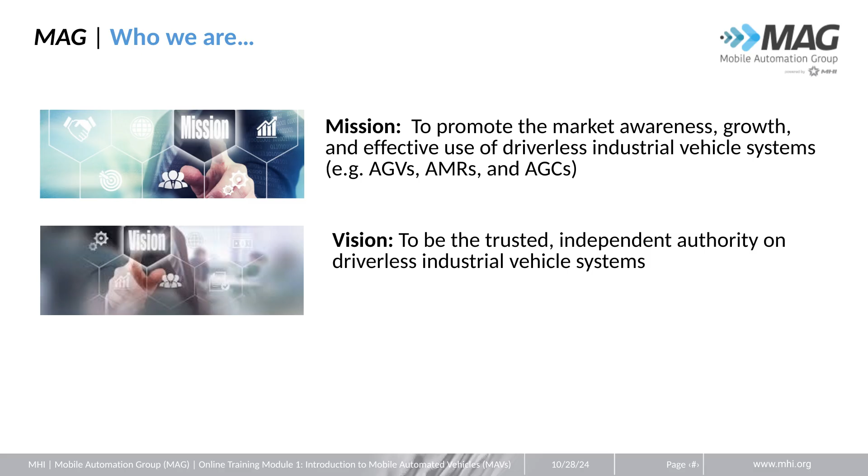What are mobile automated vehicles? Mobile automated vehicles, MAVs, are computer-controlled wheel-based load carriers, usually battery-powered, that run on a plant or warehouse floor or, if outdoors, on a paved surface. Although some applications call for just one MAV, most installations utilize a fleet of vehicles.

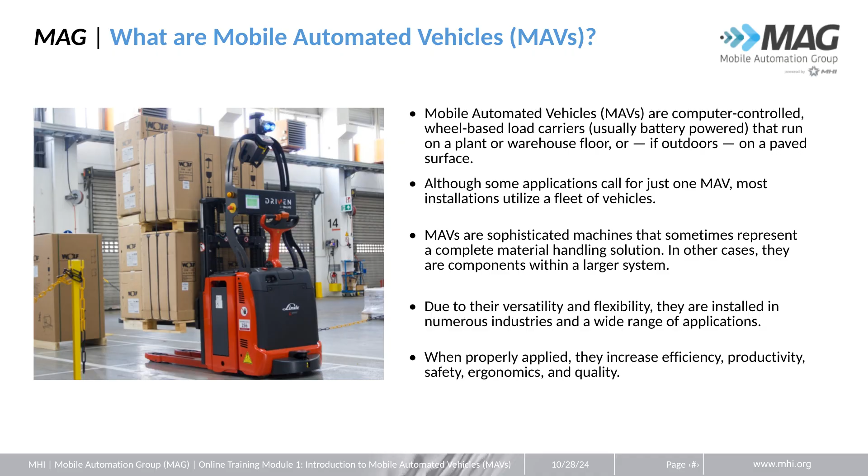MAVs are sophisticated machines that sometimes represent a complete material handling solution. In other cases, they are components within a larger system. Due to their versatility and flexibility, they are installed in numerous industries and a wide range of applications. When properly applied, they increase efficiency, productivity, safety, ergonomics, and quality.

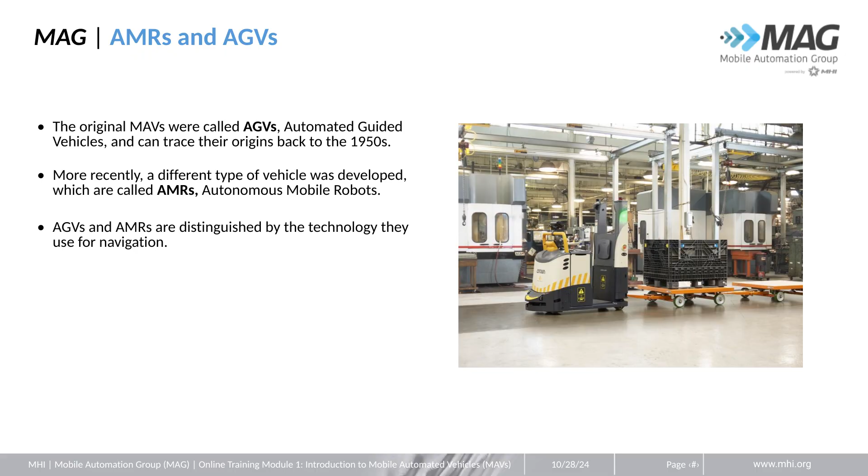AMRs and AGVs. The original MAVs were called AGVs, Automated Guided Vehicles, and can trace their origins back to the 1950s. More recently, a different type of vehicle was developed, which are called AMRs, Autonomous Mobile Robots. AGVs and AMRs are distinguished by the technology they use for navigation.

AGVs follow a predefined path and do not deviate from that path. They typically have collision prevention in case an object is in their path. AMRs sense their surroundings and make decisions autonomously on what path they take. They typically have obstacle detection to enable this decision-making.

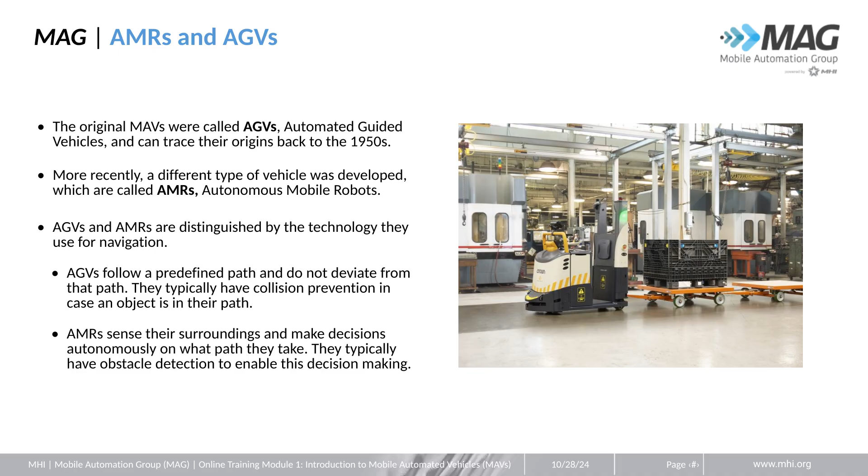Mobile Automated Vehicles Evolutions. MAV is a universal term for mobile automation technologies. As companies develop new products and standards evolve, new names continue to be introduced to describe their MAVs, such as LGVs, laser-guided vehicles, SGVs, self-guided vehicles, IMRs, industrial mobile robots, UGVs, unmanned guided vehicles, and MMRs, mobile manipulation robots.

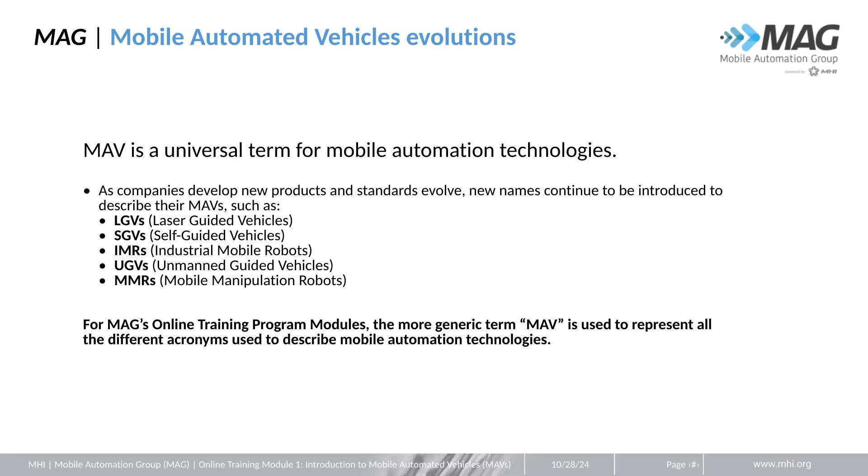For MAG's online training program modules, the more generic term MAV is used to represent all the different acronyms used to describe mobile automation technologies.

Safety is the #1 priority. An important feature of both AGVs and AMRs is that they operate safely around people. Some applications inherently must be isolated from people. These applications are typically in warehouses where faster vehicles move within dense fields of products stored in either racks or shelves. Since the introduction of AGVs, the ANSI B56.5 standard has specified how they behave when they encounter obstacles.

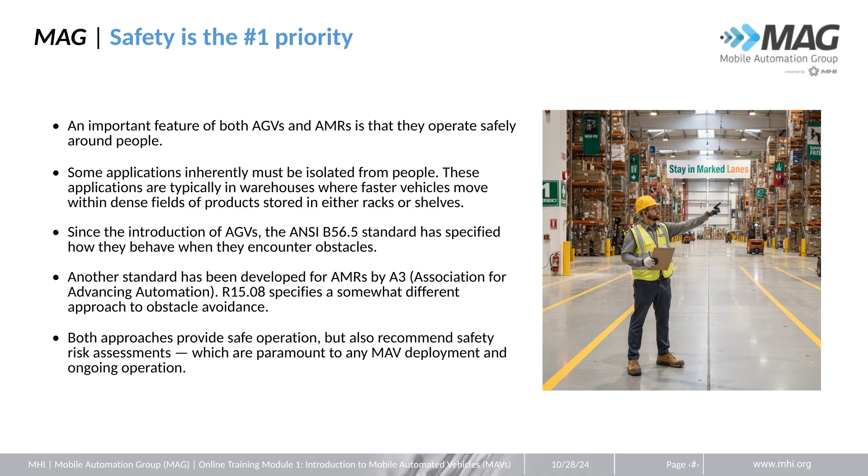Another standard has been developed for AMRs by A3, Association for Advancing Automation. R15.08 specifies a somewhat different approach to obstacle avoidance. Both approaches provide safe operation, but also recommend safety risk assessments, which are paramount to any MAV deployment and ongoing operation.

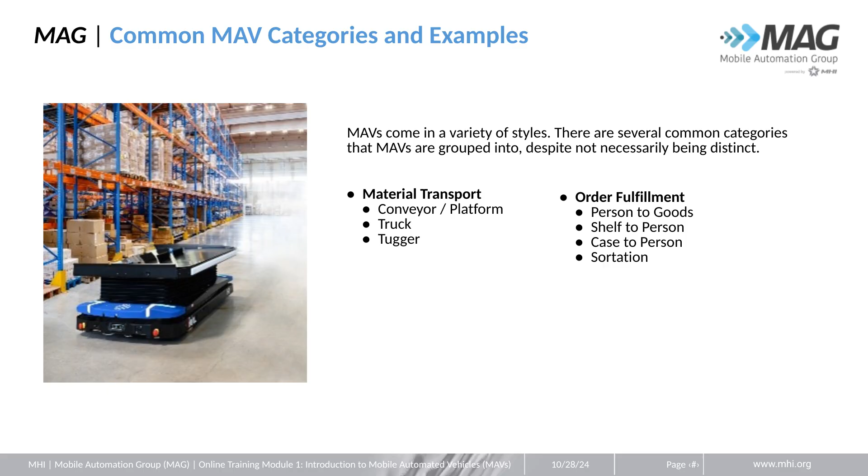Common MAV categories and examples. MAVs come in a variety of styles. There are several common categories that MAVs are grouped into, despite not necessarily being distinct. In material transport, we have conveyor or platform, truck, and tugger. In order fulfillment, we have person-to-goods, shelf-to-person, case-to-person, and sortation. Note that each of these vehicles are explained in more detail in Module 4.

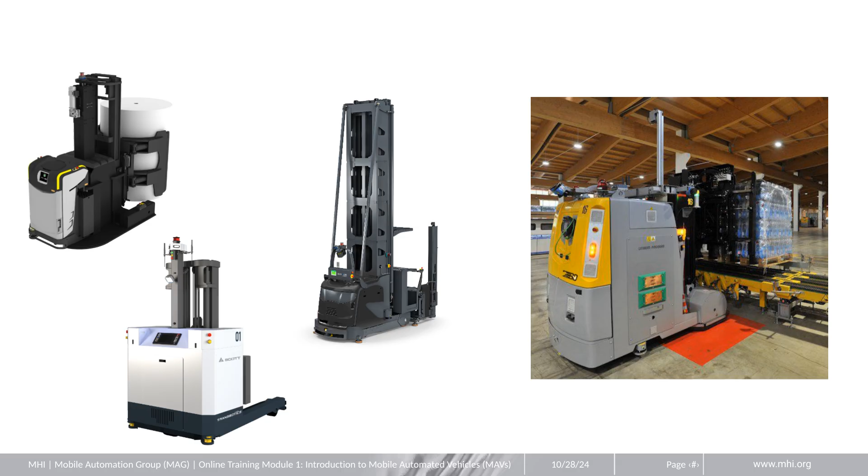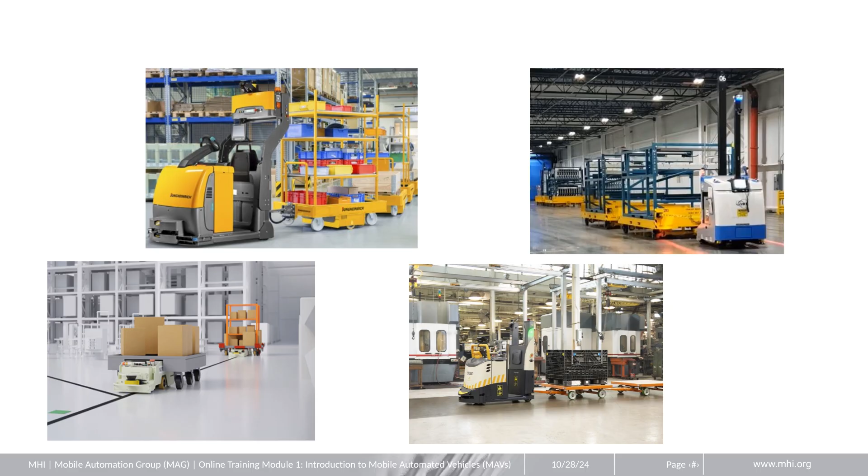Here are some examples of conveyor and platform MAVs. Examples of truck MAVs. Other examples of truck MAVs. And additional examples of truck MAVs. Here we have examples of tugger MAVs.

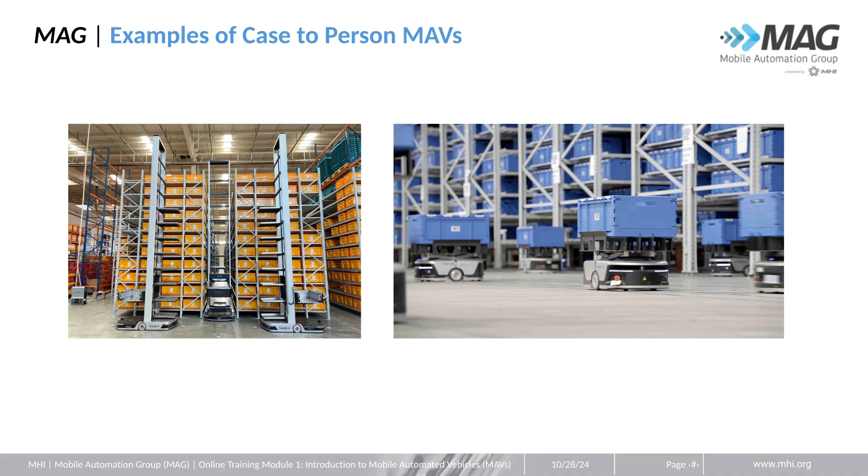Examples of person-to-goods MAVs. Examples of case-to-person MAVs. And examples of sortation MAVs. Congratulations! You've finished the first training module.

Here are the upcoming online training modules on mobile automated vehicles. Module 2, Technical Capabilities, the history of MAV safety and navigation technology development. Types of navigation systems, safety features, types of load handling, how they are powered, maneuverability, and types of MAV controls.

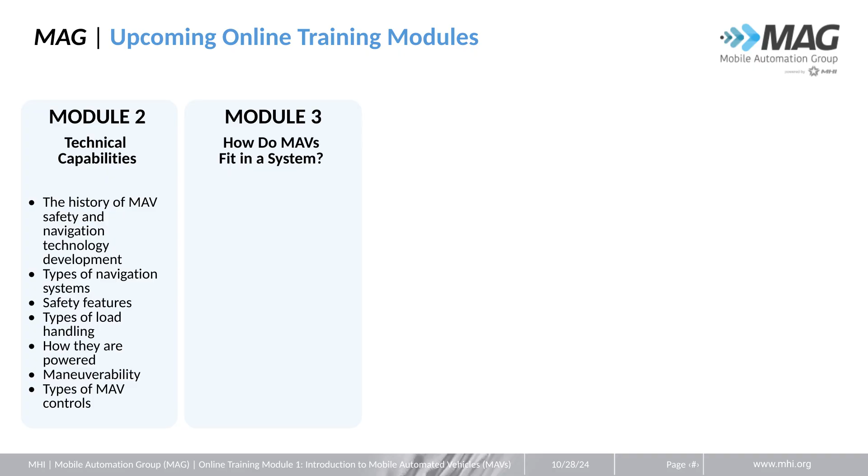Module 3. How do MAVs fit in a system? Components that enable systems, communication methods, mapping and configuration software, fleet management software, system interface options to ERP or WMS, human and machine interface HMI, battery charging methods, and common traffic rules and considerations.

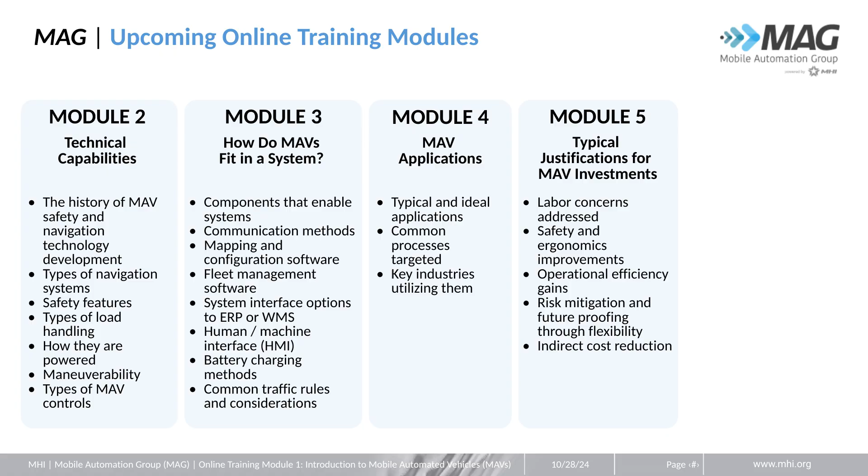Module 4. MAV applications. Typical and ideal applications, common processes targeted, and key industries utilizing them. Module 5. Typical justifications for MAV investments. Labor concerns addressed, safety and ergonomics improvements, operational efficiency gains, risk mitigation and future-proofing through flexibility, and indirect cost reduction.